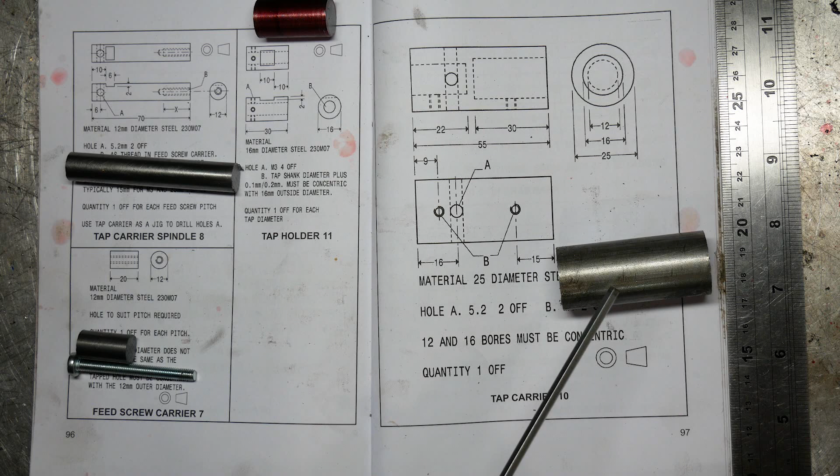Well, this is really the final part of the series, I hope, unless I really mess it up again. We are making 4 parts, and this is basically the assembly for all the tapping, the business end of the tapping stand. So here we have what's going to be the tap carrier, a 25mm piece of steel, 55mm long, and on one side it's going to be bored out or reamed to 12mm to hold this tap carrier spindle, and the other end reamed to 16mm to hold the tap holder.

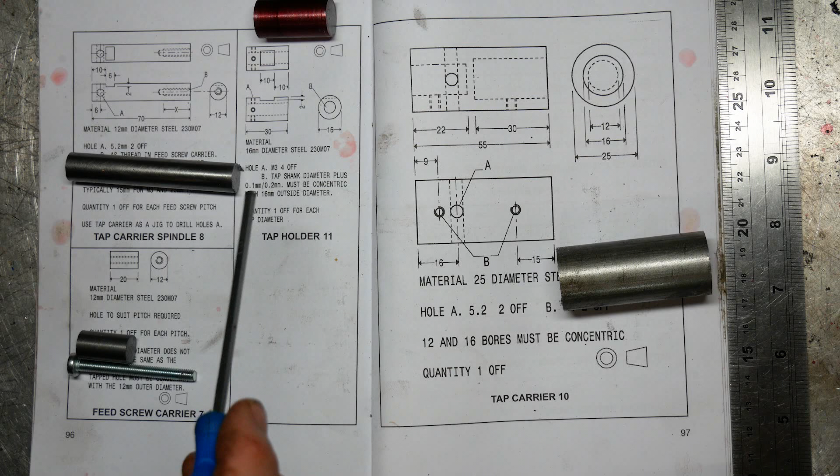But as we remember from before, I don't have a 16mm collet, so again I've reduced this to 15.5mm because I'm going to have to do some quite precise drilling, so I want it in the collet rather than the 3-jaw chuck. So I've got to remember that I've got to bore out to 15.5, not 16mm, otherwise it's not going to be tight and accurate.

So as I say, we have the spindle. This part is going to go into the tap carrier, and on this end is going to be the feed screw carrier. So the feed screw is going to go through here and screw into this part of the tap carrier, and then when I turn this, because there's going to be a Tommy bar through here, as I turn it, it's going to screw down at the same pitch as the screw.

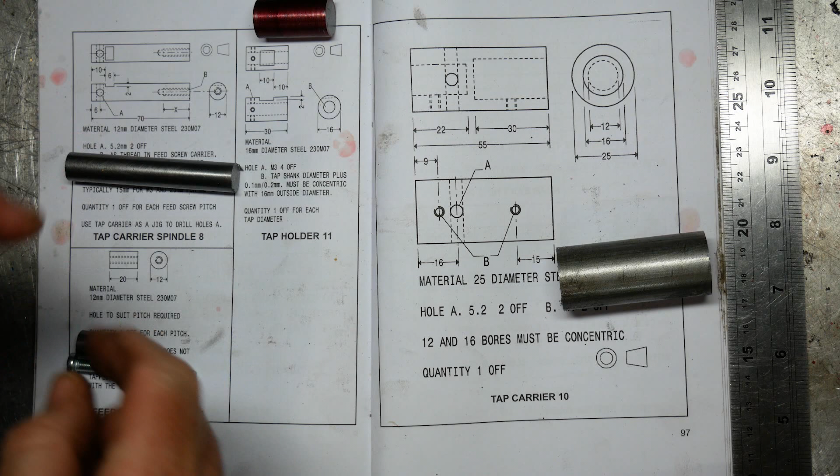So it's important that the screw you use is going to be the same thread as the tap, which I've made sure is correct. So that's the basic operation.

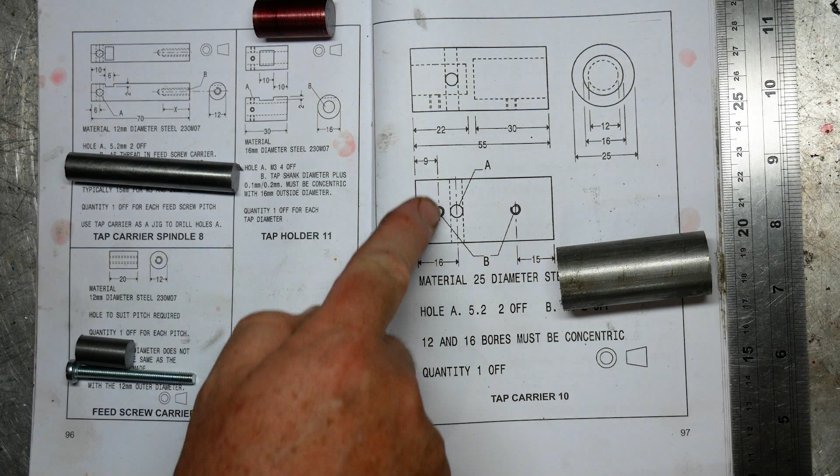I'm going to start with this tap carrier, I think. It's the bigger operation, and I can then use it, as he suggests, as a jig to drill the holes into the spindle. So once I've drilled the 4 holes for the Tommy bar, I can then use it as a guide to drill into the spindle. Anyway, I hope all that makes sense. Hopefully it'll become more obvious as I start drilling and hacking and making a mess of things. So first thing is I'm going to start drilling and boring this bar.

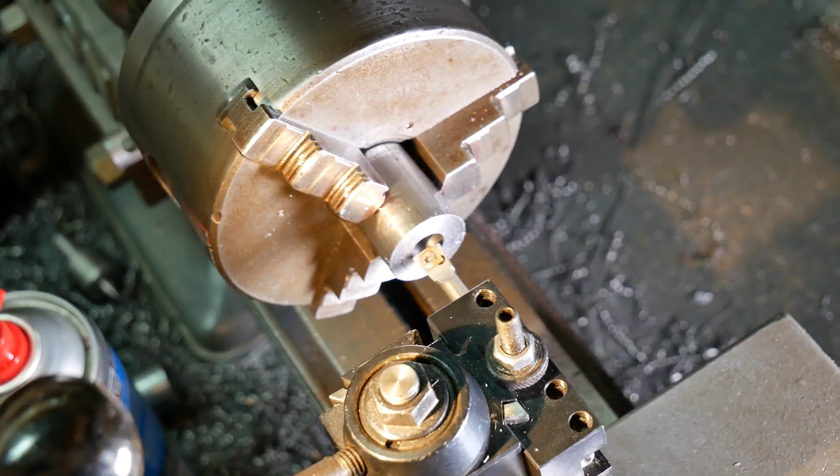Okay, now I think it's time to switch to the boring bar. So this might be a slightly tricky operation with the camera in the way, but I've also got my piece of 15.5mm, which I'll be able to just gauge when I've got it about right. Alright, always slightly nervous boring, but...

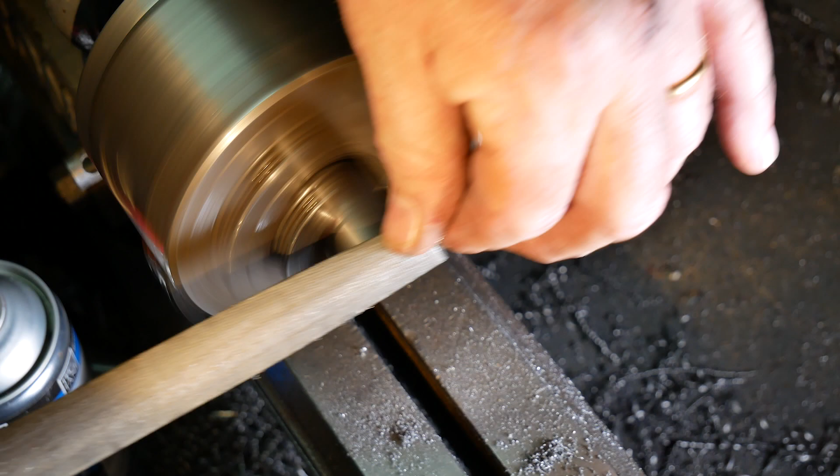Okay, so I've got the hole to about 11.5, 11.6 mil. I remembered now that I've got a 12mm reamer, which I'm going to try and use here. It's a machine reamer. I'm going to go very slow with it. 12mm bar. Bingo. Oh, it's so nice when that works.

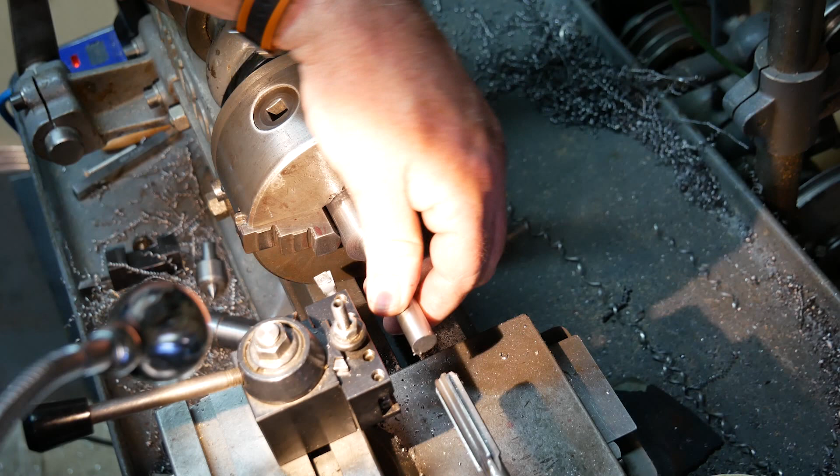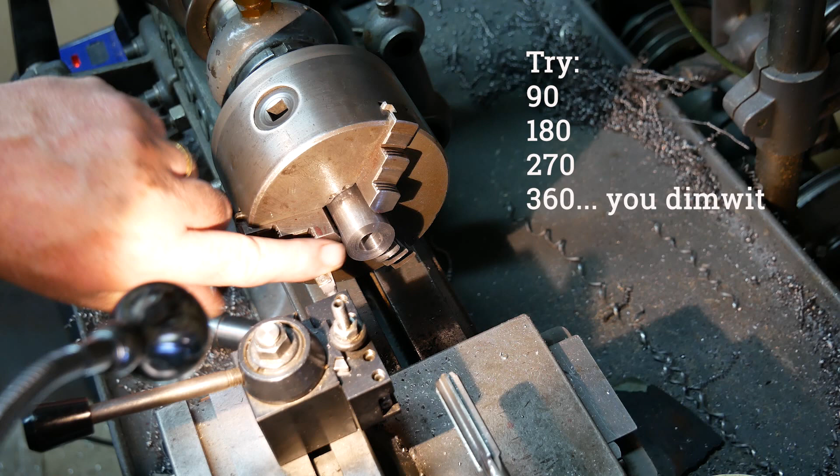All right, good. Okay, the next stage is much trickier because it's going to involve drilling at 90, 180, 270, and 360. Sorry, I'm tired. And I'm going to try and think of some clever ways of doing that.

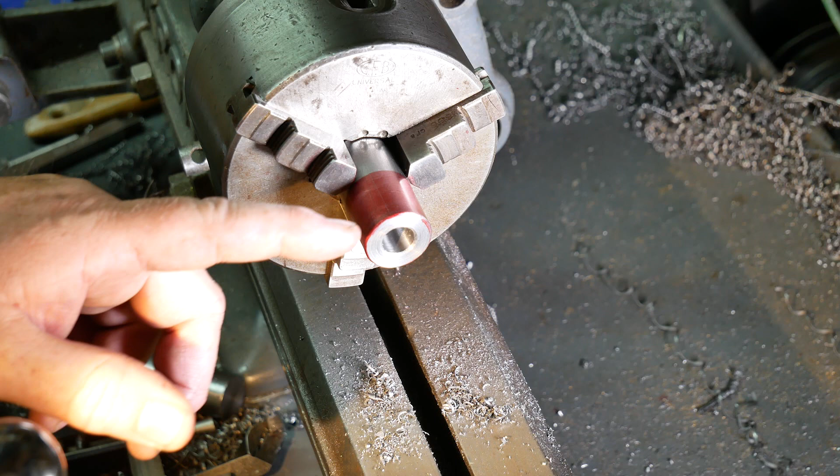So bear with me. So I've got to make two marks here. One at 16mm, which is where I'm going to drill the holes for the Tommy bars, and one at, hang on a sec, 9mm. So one at 16mm, one at 9mm. The 9mm one is where the grub screw, the retaining screw, is going to be placed to hold the spindle. So the first one I'm going to do is at 16mm. 9mm. Okay.

But what I am going to do is put the dividing plate on my lathe and mark out the 4 quadrants, and I think that's going to be the most accurate way to do it. So bear with me while I get all that sorted out.

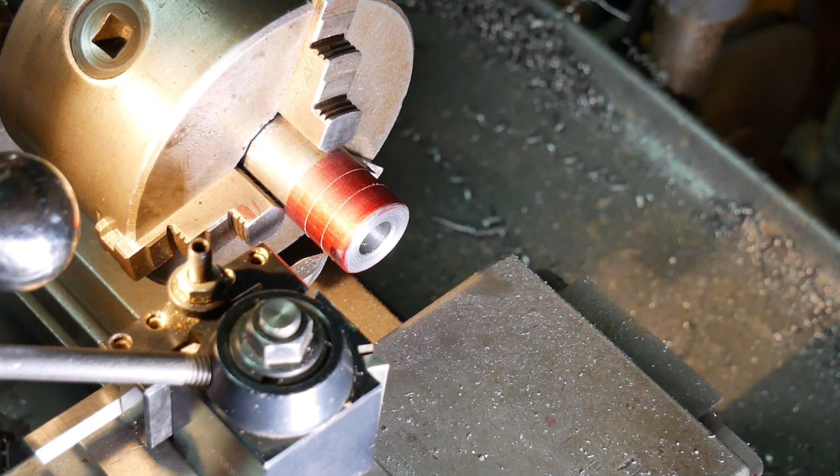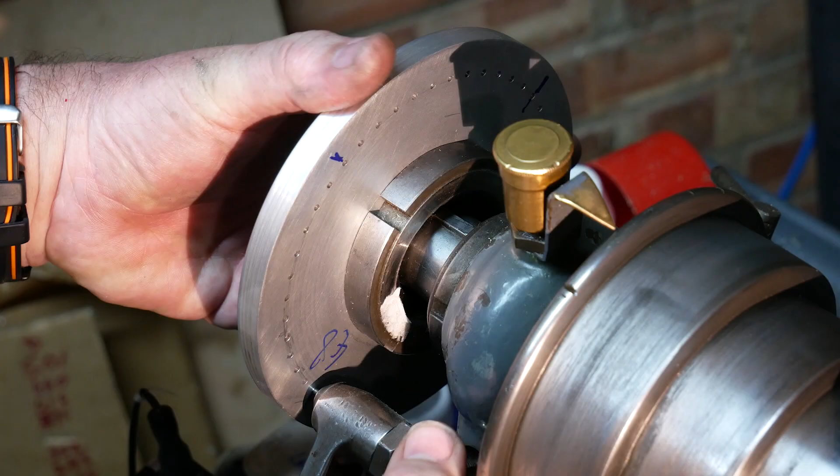So I put the dividing head on the lathe, and I know that this graver is absolutely centered. So what I'm going to do is score it. So I put the light in the wrong place, so I can't do it. Hope you can still see it okay. So I'm going to score the bar. I don't know if that's going to come out. So I've got the 2 places where I need to cut it. Then I'm going to move it to 90 degrees. Score it again. Another 90 degrees.

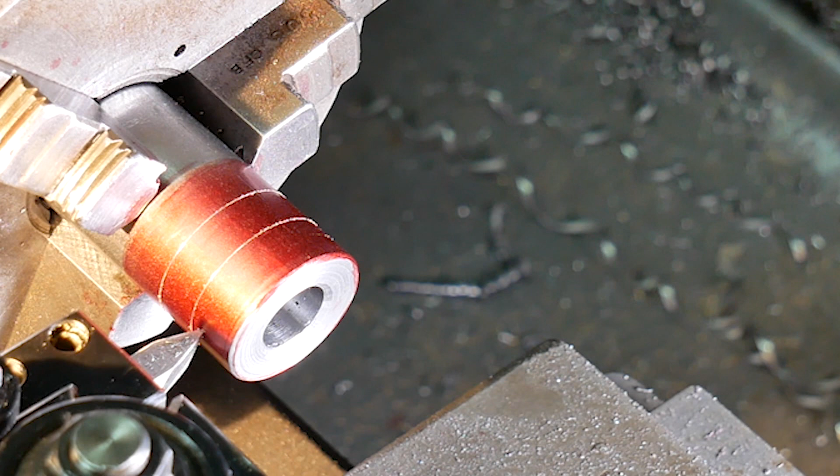Another 90 degrees. And if I've got this right, when I go back to the next mark... yeah, I'm back on my 90 degrees. Okay.

So the next thing now is to be able to accurately drill in the center of this rod, and for that what I'm going to do is make myself a drilling guide using a small thickness of this 25mm bar.

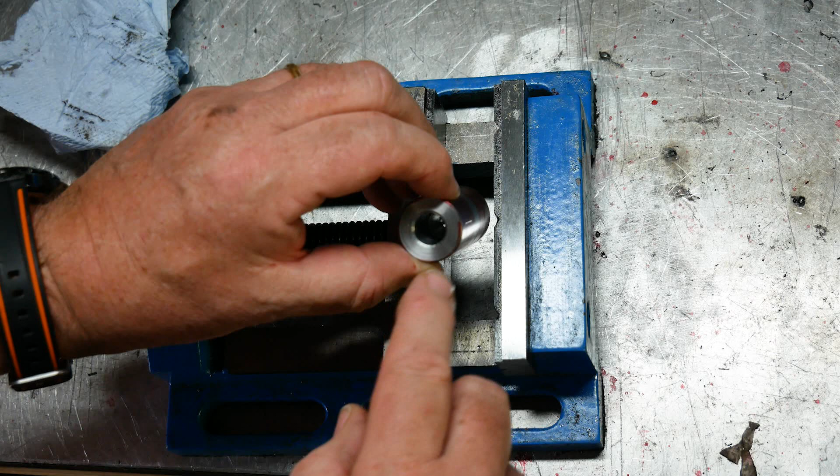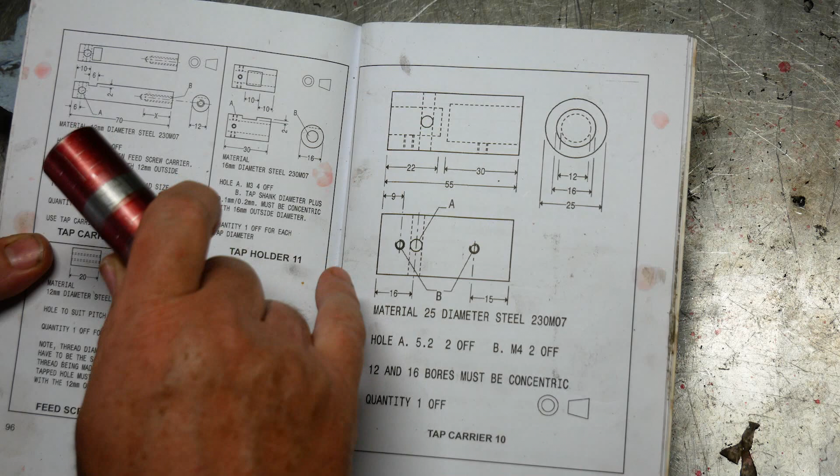So here's the piece, 12mm bore here, 15.5 bore here. Now I need to drill these holes. First, there are the two holes he's described as B, which are M4 tapped, to hold the grub screws that hold the spindle and the tap holder in place. Then crossways there are two holes to be drilled 5.2mm, which are for the Tommy bars.

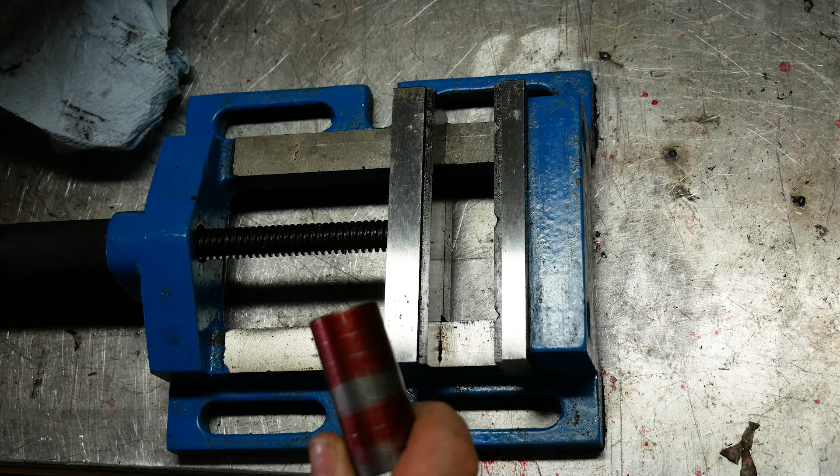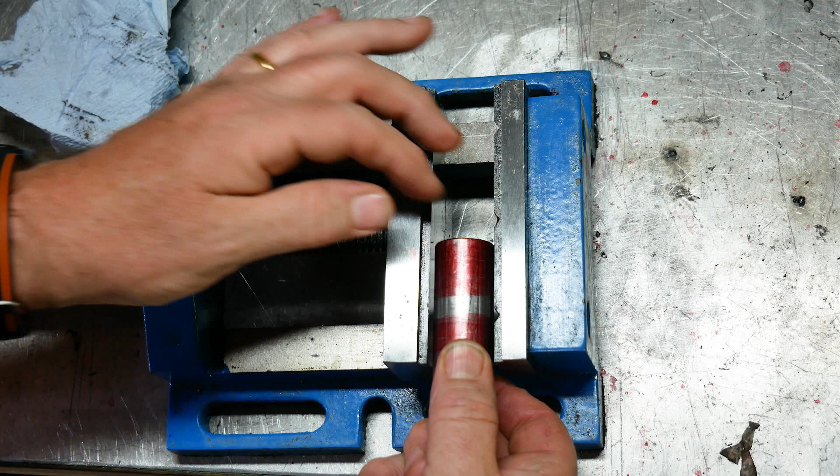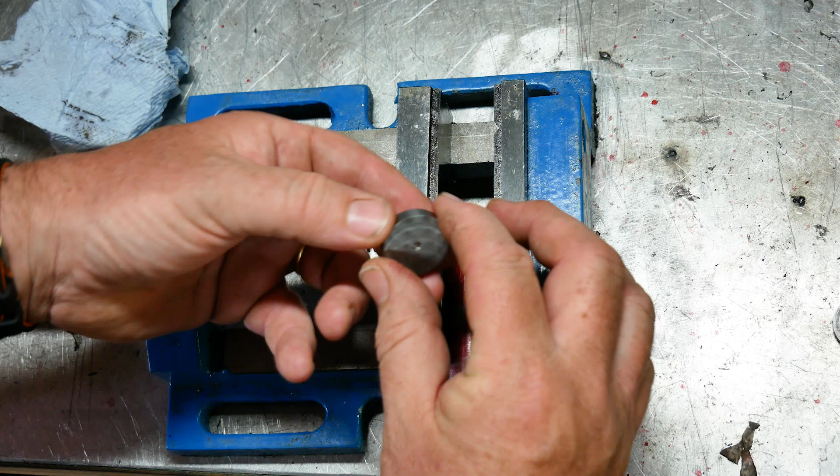That's always tricky to do, but as you saw, I used my dividing plate and marked the 4 holes on the bar. The next challenge is to drill straight down, and I've stolen a trick from somebody else on YouTube where I've made these very thick washers out of the same stock, so it's exactly the same width. I've drilled one 3.2mm, which will let me tap M4, and another tapped 5.2mm so I can make the bigger holes. So that's really a drill guide.

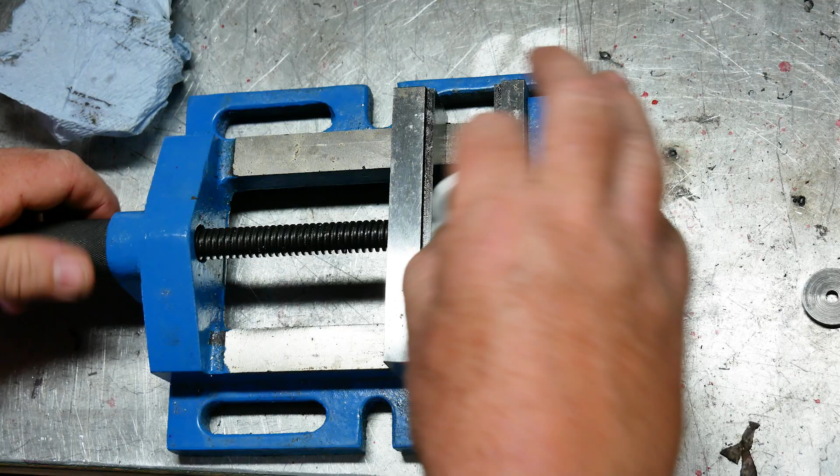So what I do with that, using some parallels, is find the hole or the line. Anyway, you kind of get it, I think, without me making too much of a mess of it. Basically I've got to find the line through that hole, clamp it all together, and then I know I am perpendicular, and then I can drill the holes through. So let me set all that up and we'll carry on from there.

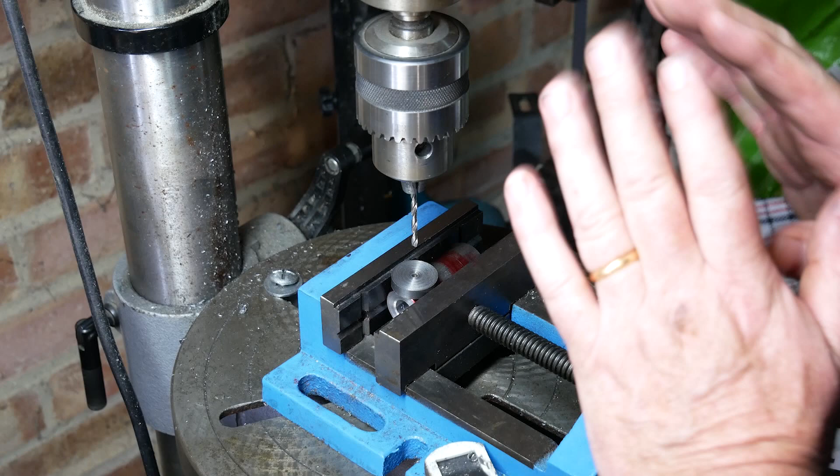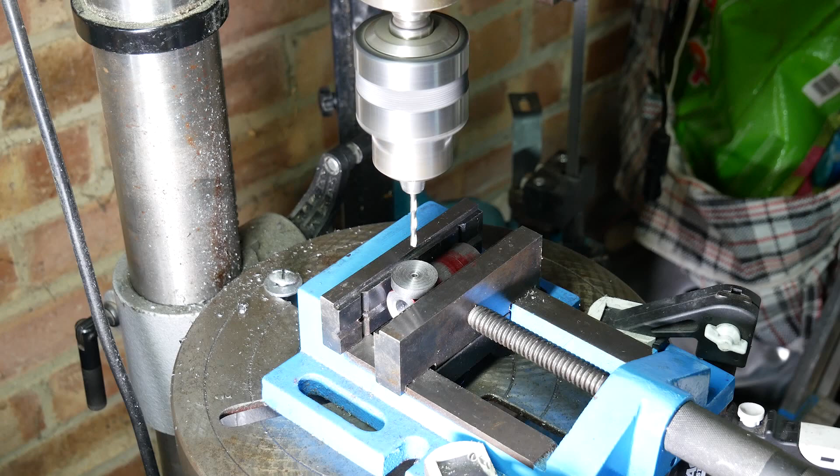I'm going to start with the smaller holes. I've placed the guide over the crosshairs, so hopefully, and I'm really hoping, that if I drill down I will be going straight over those crosshairs, exactly perpendicular to the center part of the rod. So let's give that a shot. Drill going nice and slow. Need to add a bit more light to this.

And I'm going to try and drill straight through to the bottom. Oh no, this one doesn't have to be all the way through. What am I talking about? Okay, that's fine, this is only going in that way.

Now I also need the same hole on the other side, because there's going to be another grub screw for the collet holder, for the tap holder. So what I'm going to try and do is, without disrupting anything, move that over and be over that line there. Let's hope that works.

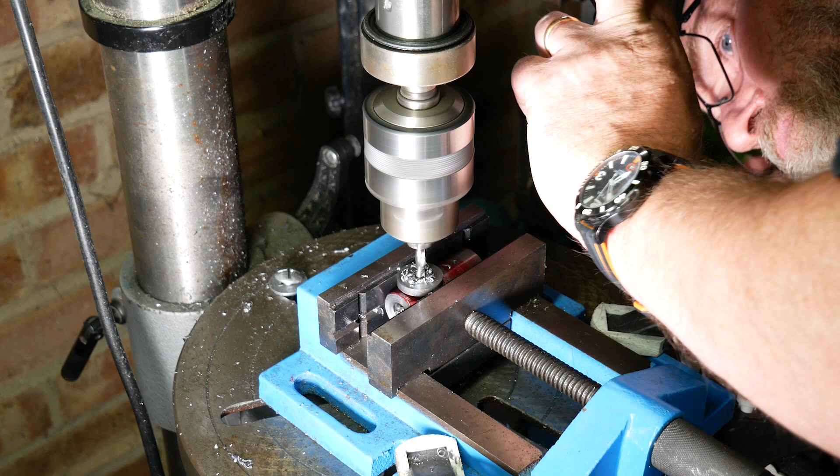I'm through. Okay, let's see if that worked. Yeah, look at that. That's pretty good, actually. I'm really pleased with that.

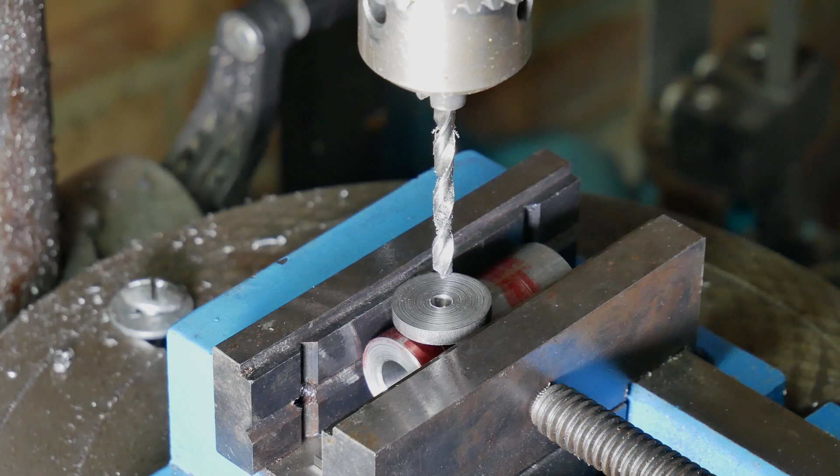So now I'm going to set up at 90 degrees to that. Give me a second, and I'll be back. So as I said, now I've turned it 90 degrees, and I'm having a shot at the other one. I'll be using the same basic technique.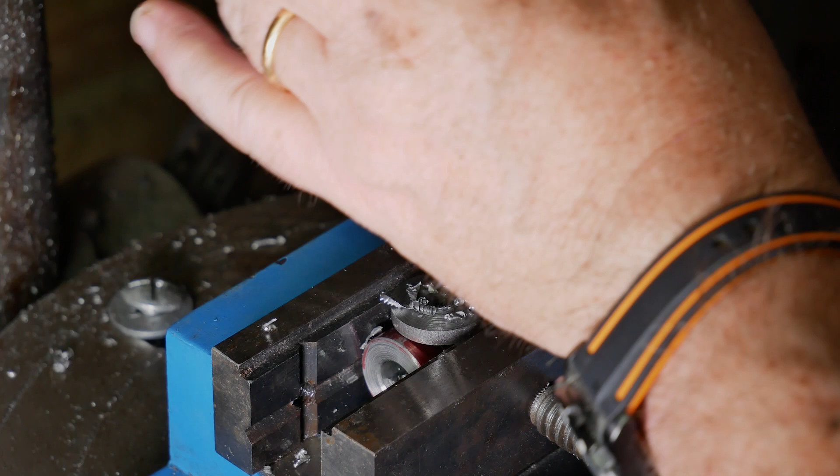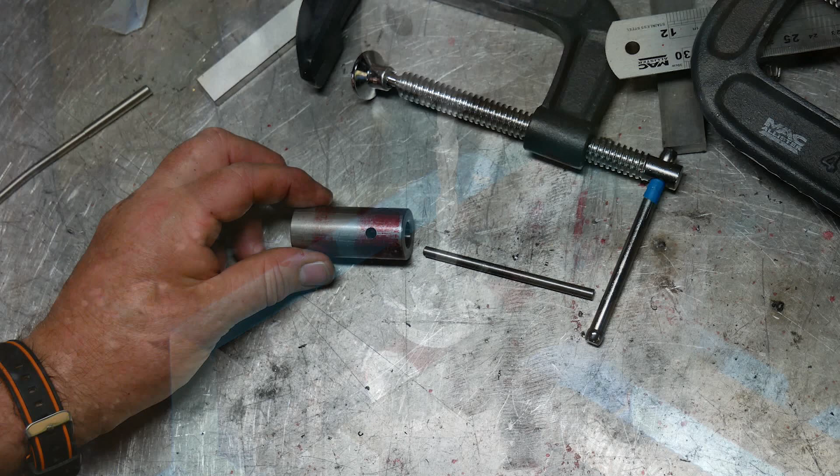Okay, so you saw what happened there, but I think I'm already quite well set up to drill through, so I'll do that off camera, and I think everything's going to be all right. I'm really quite pleased with that, because I hit the target on all 4 holes. You probably won't be able to see this, but I can see them, and it's great, because one Tommy bar, another Tommy bar, and then the 2 holes here, which are going to be tapped to M4.

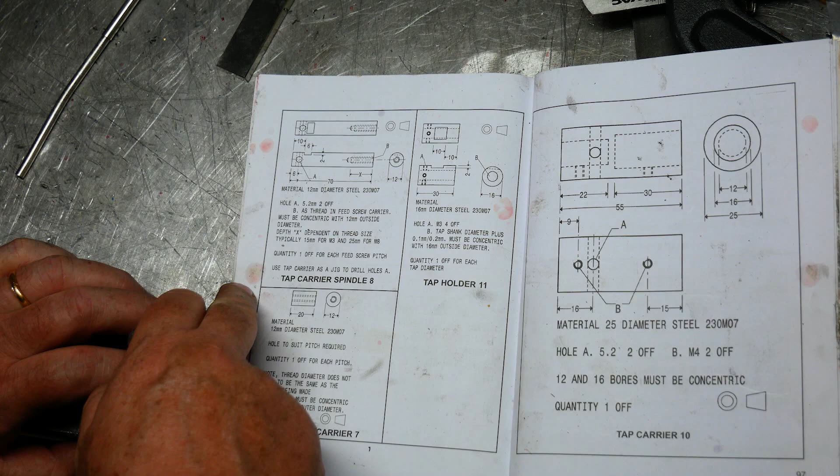So that's great. I'm going to leave this one for now and start working on the next piece. The next thing I want to work on is this piece here. One interesting thing is it tells me to use this piece as a jig to run the 5mm hole through, which is great, because I'm quite confident doing that. It's a really good fit. I'm really pleased with that. It's as good as I've ever got, probably.

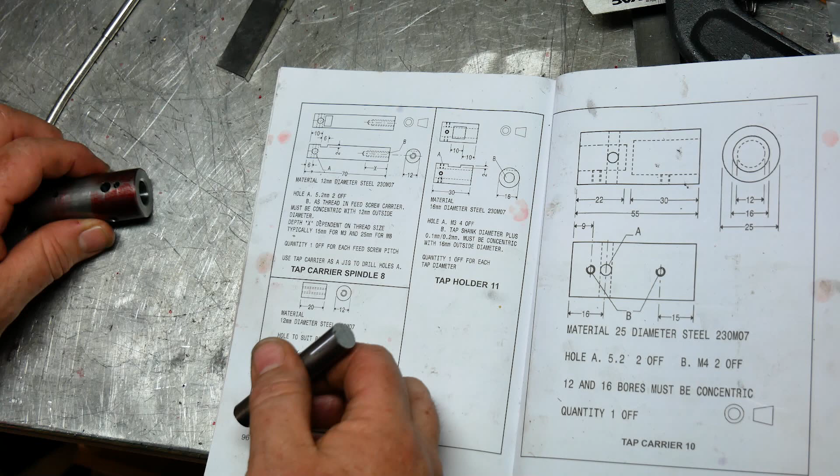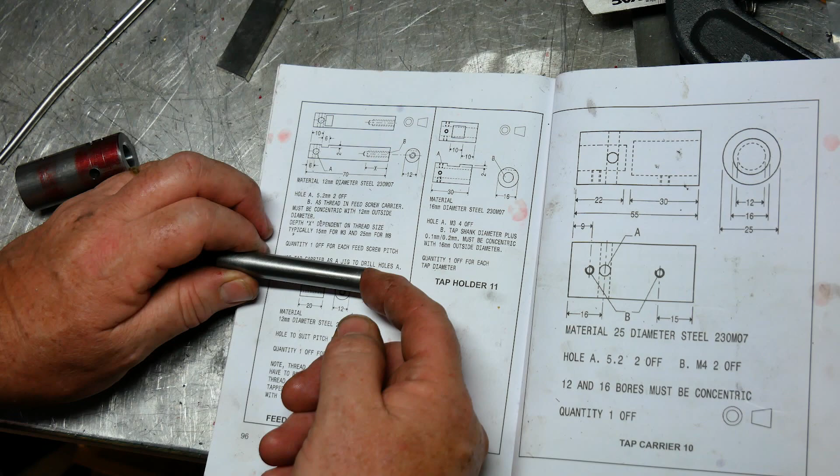The other operations that have to be made: I need to mill a 6mm notch, 2mm deep, and then drill and tap a hole to hold the screw, like this. Again, I said I was making this an M5, I think. So I'm going to have to drill this 4mm or something like that, and then tap it. So that's all going to happen in the lathe, and then the notch I'm going to attempt on the mill.

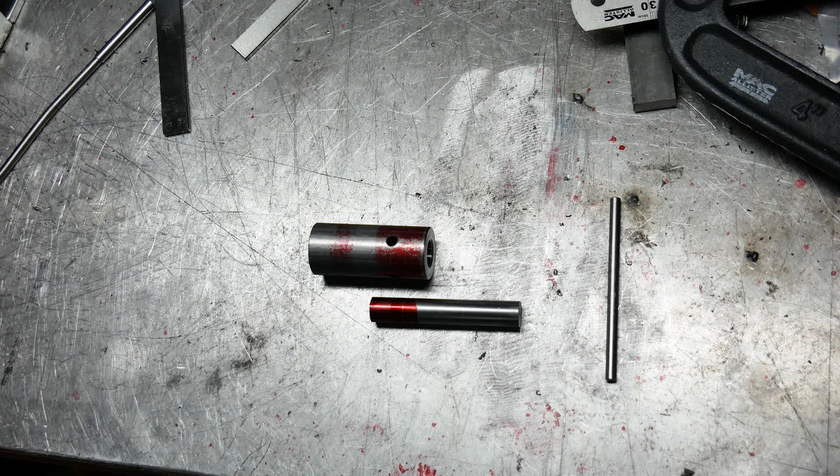So I'm going to make another confession, that I've always been incredibly bad at chess. And one of the reasons is I'm very bad at thinking several steps ahead. I tend to be very much in the moment.

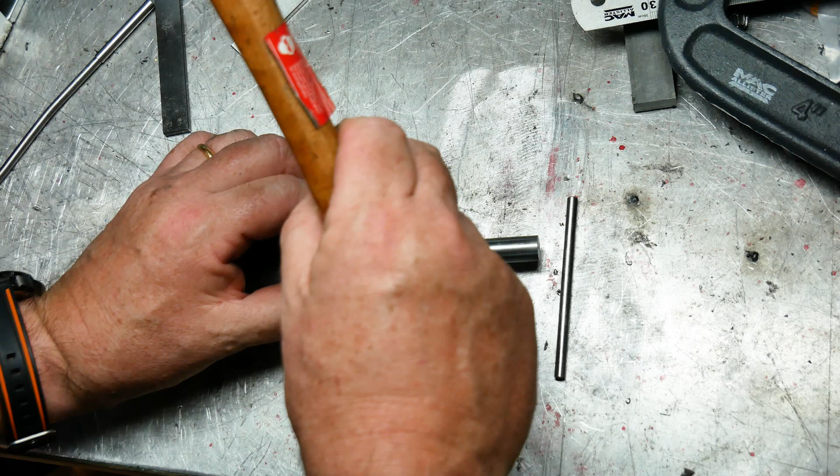And I suddenly realized that actually before I notch or mill that notch, I should know exactly where I've got the hole placed for the Tommy bar. So I decided to mark and measure that so I've got some sense of where the notch should be, because if I'm right on the mark, I can follow his plans. If I'm not, look at that.

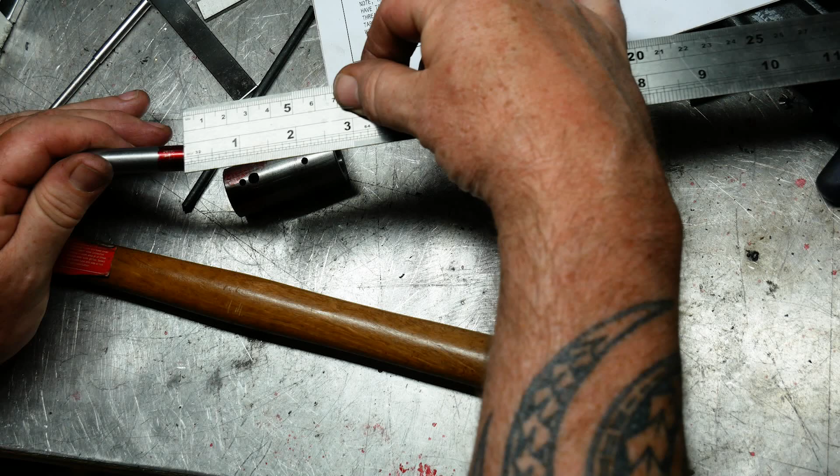Okay, so what I'm going to do is mark that off, and mark the beginning of that, 5mm in. Okay.

So I'm now going to try and mill across here. I've marked it out. I hope I've clamped this in really well. Let's see if that works, huh? Going quite slow. I'm going to make some very fine cuts.

So I want to measure whether that's about 2mm. I'm quite pleased with that. It's not 2mm, but it's 1.97, so that'll do.

And I suddenly realized that what I'm going to have to do is tap these, because then if I hold that in place, when I drill there, it's going to be a lot more secure. So the next thing I'm going to do is tap these to M4, put the grub screws in, hold it in place, and then I can drill through that piece there.

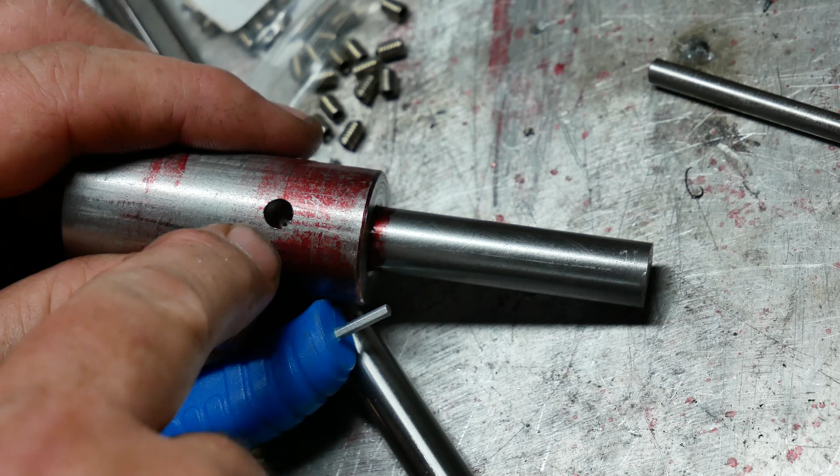Okay, that's great. I can see there, I don't know if you can see it, but the hole is exactly where I wanted it. Let's see if that shows up. So now what I'm going to do is drill through that at 5mm, 5.2mm, so the Tommy bar goes through both, and the grub screw should now hold that in place.

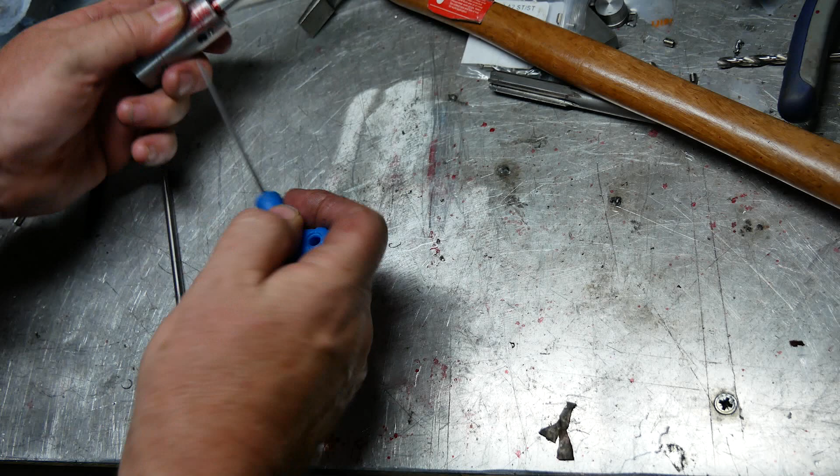Right, so again, that went quite well. I've drilled through. There are two angles for the Tommy bar to go through. That's held in, so if I take that out now, this may be out of focus, I'm sorry if it is. And I'm probably going to have to get this out in the vise. Hang on one second.

So there we go, there's the hole through there, the hole through there, the hole through there. That's all pretty square. I'm really pleased with that, actually. Grub screw goes through there. You can see the mark where it's gone in. So okay, the next part of this is now going to be to drill and tap this part.

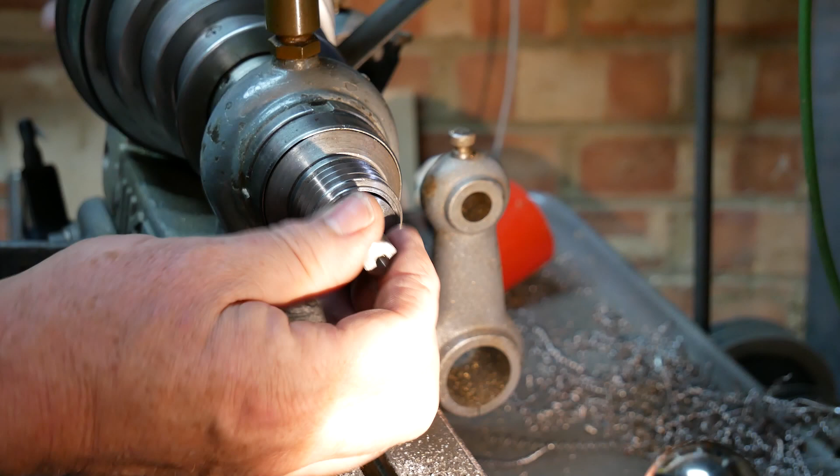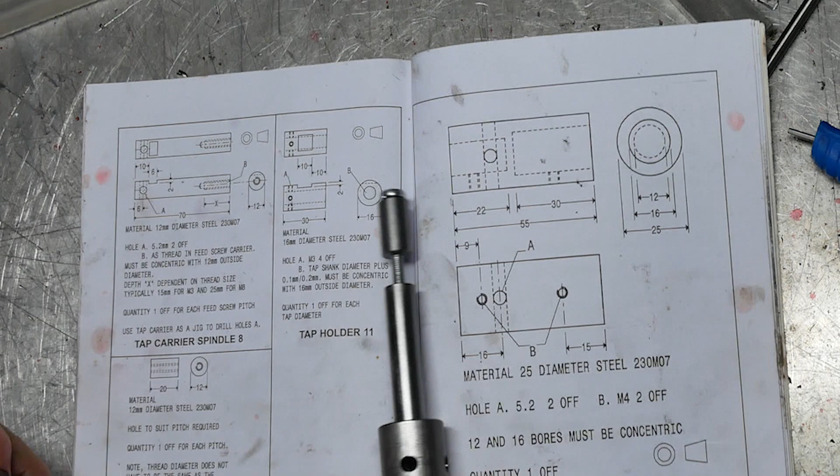Okay, so I've made this part, this part, and this part. I did this off camera because it literally is just tapping and drilling a piece of bar. This bolt is clearly much too long, and I'm going to have to cut that down. That's all I've got at the moment. So now it's on to make the tap holder itself.

So this is the piece of 15.5 machined steel that I'm using. First thing is that hole that goes through, so hole B as he describes it, is the shank of the tap plus 0.1 of a mil. So I've measured the shank of my taps and they're 5.5 mil. So I'm going to make this, I want to start with 6 mil, 0.5 mil, let's see, actually 6.5, something like that, anyway.

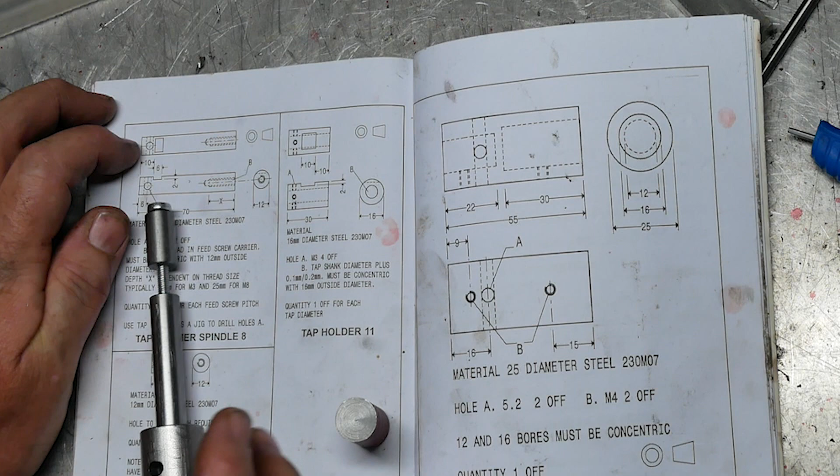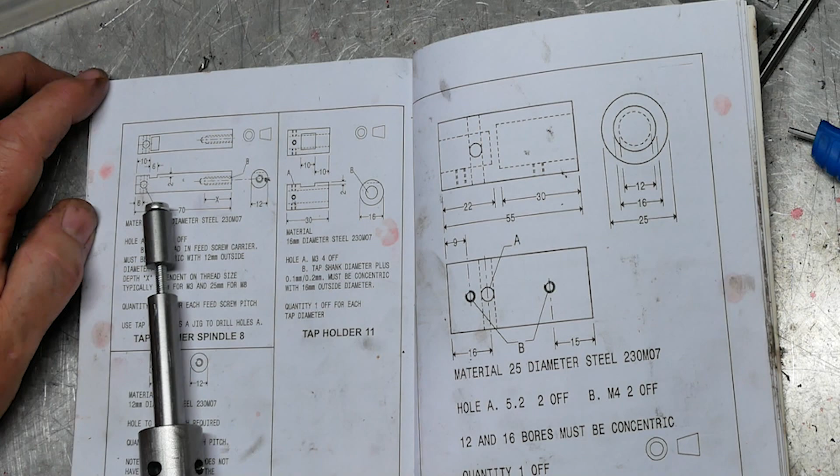And so that's going to go down the middle, and then I've got another pane which is to cut these perpendicular holes to hold the grub screws. On this occasion I'm actually going to use the milling machine and its dividing head, because I have a collet that will fit this and I have a collet that will fit the drill bit. So that's the first one I'm going to do, because I think it's going to be by far more accurate.

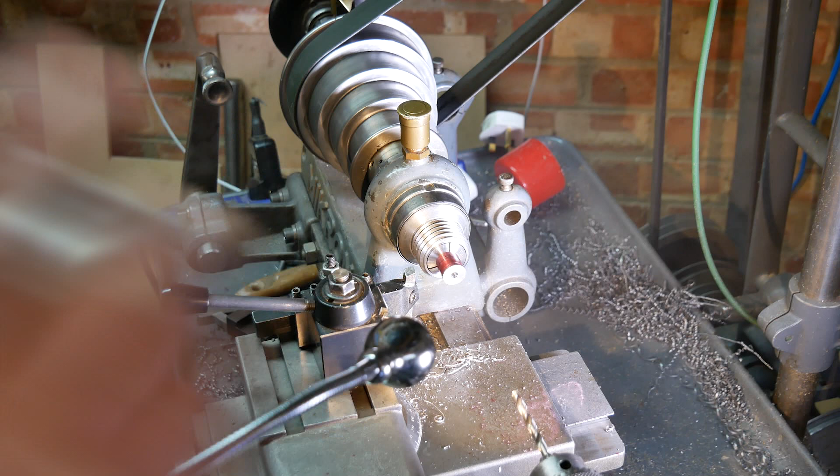It's a good thing I double checked, because in fact the tap I measured wasn't the tap I'm planning to use full time, and the one I was planning to use actually has a shank of just under 5 mil. So thank God I checked that. So now I put a 5 mil bit in here, going to go through the final pass, and let's hope that this works.

Let's check. Yeah, it's a really nice fit. Okay, great. Really pleased. That's a really tight fit. Lovely. Okay. So now the next thing to do...

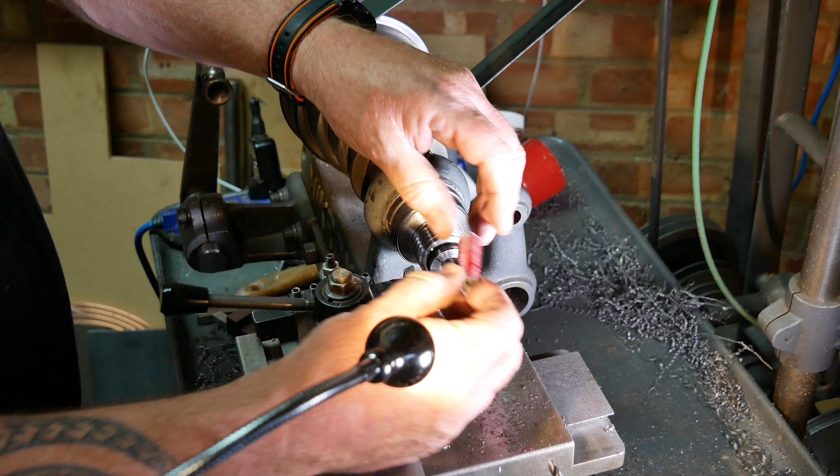I've already marked it out while it was in the lathe, but I'm going to cut the rebate in here.

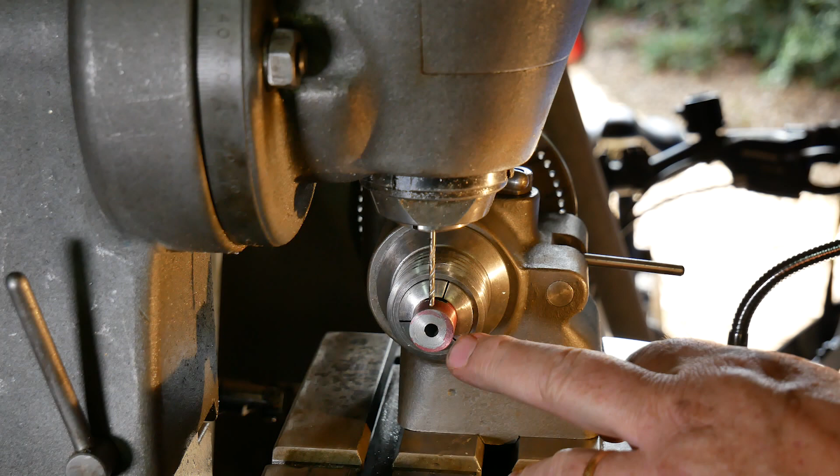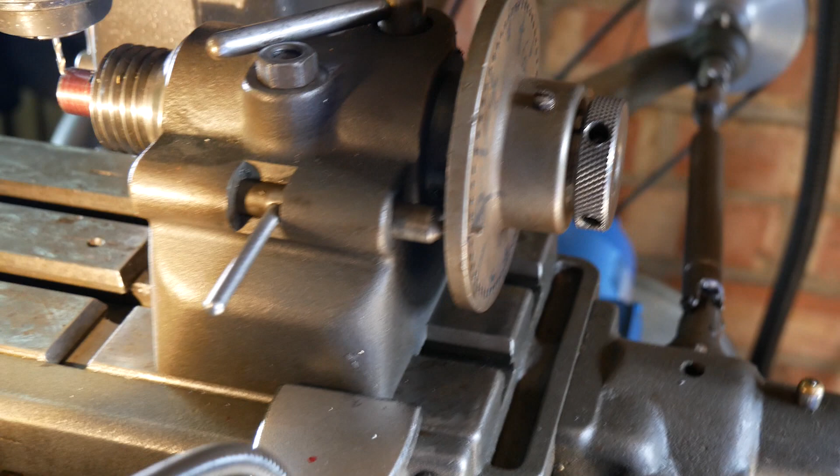Okay, next operation. So as you can see, I have put the piece in the dividing head for my F75 milling machine. I was very lucky to get this with the mill. These are like hen's teeth now, very, very rare. And when they do come up, they're way over my pocket money. In fact, they probably cost as much on the open market as I paid for this entire machine.

Anyway, the beauty of that, of course, is that I'll be able to drill very accurately the 4 holes that I will then tap for the grub screws, and also it's very easy to eyeball it to make sure that I'm absolutely bang in the middle of the rod. It may not look like it to you because of the angle of the camera, but trust me, I have got it accurate.

And do you know what's really occurred to me, what I could really do with right now is a tapping stand. I wonder where I'm going to get one of those.

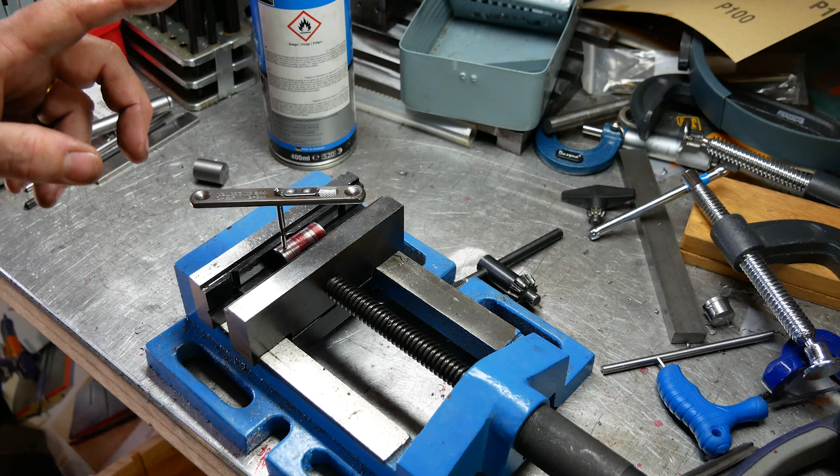Okay, time to tap. For any of you who don't know, these Eclipse tapping handles are absolutely superb. It's so much easier to find the straight edge. They're easy to handle. They make them in different sizes. Sadly, I haven't got a bigger one, so I use them for the M2s and M3s. But they are absolutely wonderful. I'm a huge fan of these. Probably right in the frame doing this, so it's probably a terrible angle. But anyway, you know what tapping looks like. I don't think I need to film much of this.

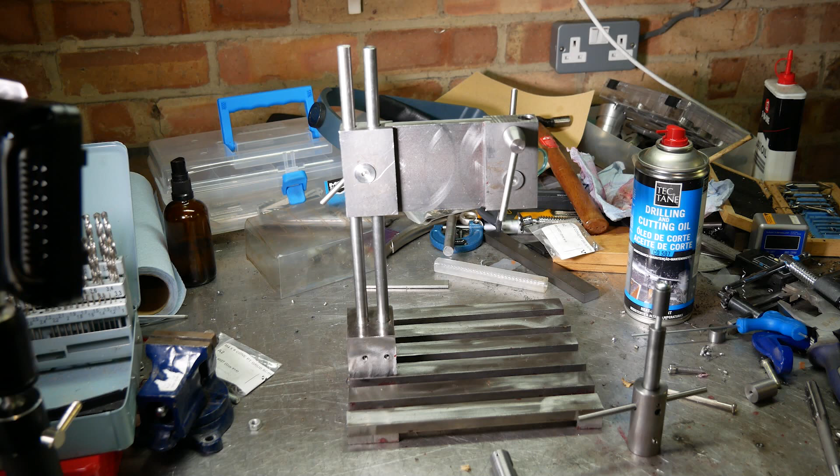Okay, let's put this all together.

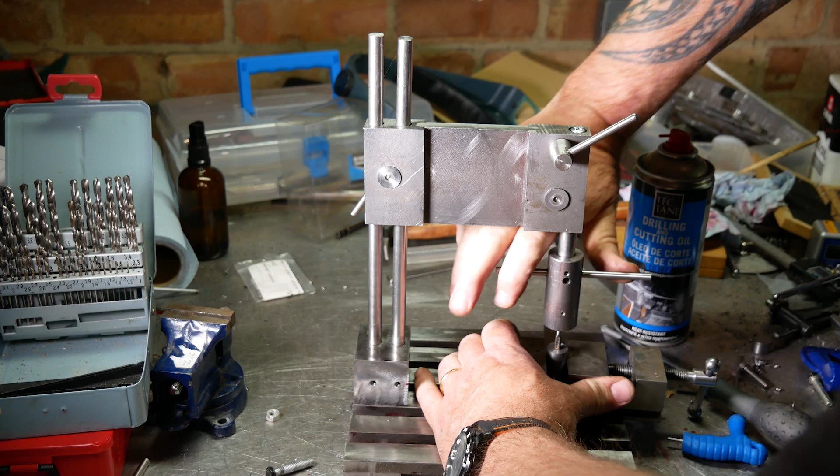Alright, let's see if this thing works. Obviously, eventually I'm going to... it absolutely works. I mean, it's difficult because I haven't got this clamped down, but this is absolutely working.

I had started it, okay, so this is something that I'd already part tapped, so that's why it went in so easily. But I'll tell you what, once this vice is clamped down, this is absolutely working.

Hurrah! I did it. I'm overjoyed. It's been a hell of a fight, but I really couldn't be happier. And I'll clean it up a bit, make some clamps for this. But we've got a tapping stand. Of course, I'm going to have to make lots of other collet holders, well, tap holders, probably M3, M4, M5, M6, M8, and there we have it. And also I'm going to replace that with a proper bolt. We're really chuffed right now, feeling very chuffed.